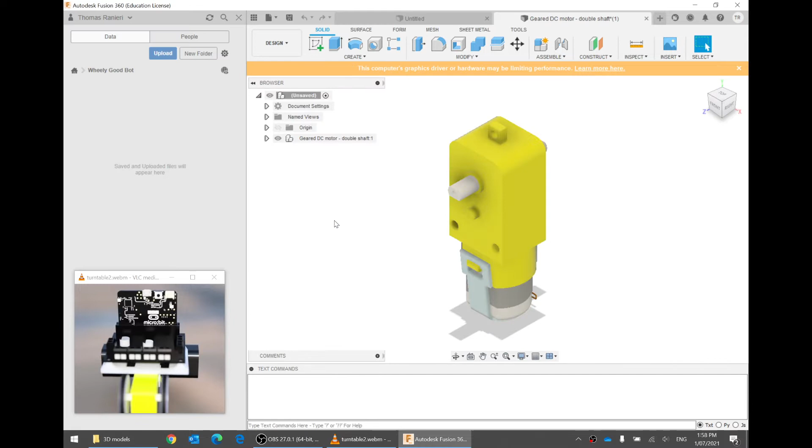There are two here. There's one with a double shaft and one with a single shaft. If you let this go spinning for a little bit, you can see this motor has a shaft that goes all the way through both sides so that both wheels spin at the same rate. So we need a double shaft. You can double click on that, or you can click on Open, and then it's there. Excellent.

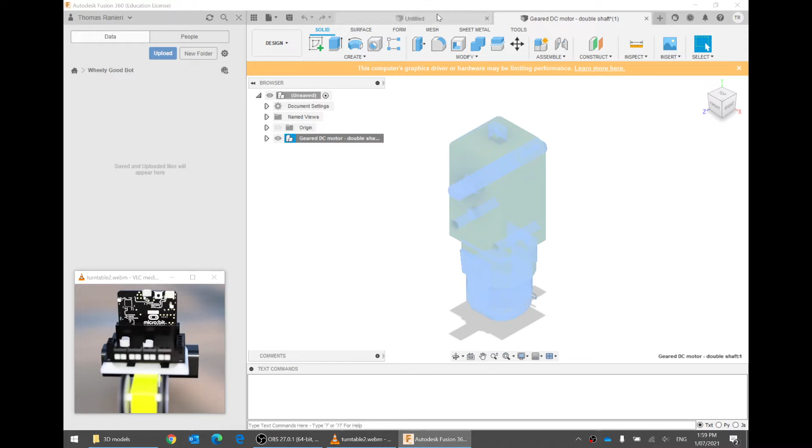But this isn't in our original file. We want everything together. We don't want to have a whole bunch of separate files. So how can I move this component into this file? Good question. I'm glad you asked. If you right click on this component, so you've got the whole model, whole assembly, and you've got this particular component called geared DC motor, you can right click and go copy. Now you can go into our empty file, right click and go paste new and go OK.

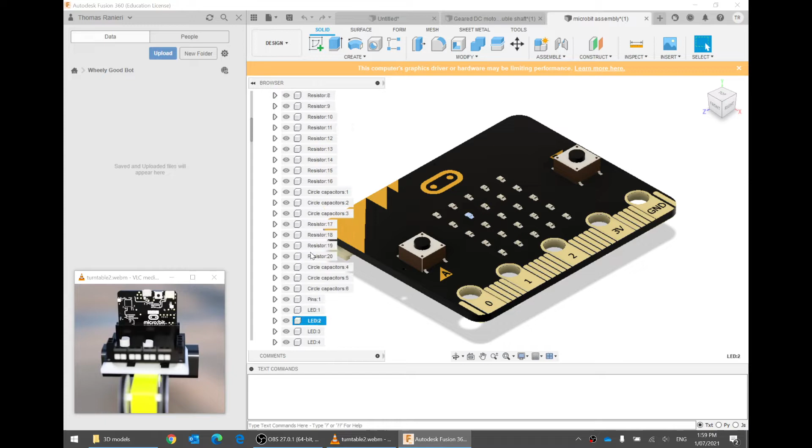We can do the same for all of the other components that we will need. Open from my computer. Let's do the microbit assembly. An assembly is a bunch of components all joined together. You can see the assembly, for example, has a whole bunch of resistors and USB port, and what else has it got? LEDs. So it's everything all together. I'm going to collapse this so we can just see the microbit component. The same thing, right click on the component, copy, go into our empty file and paste new.

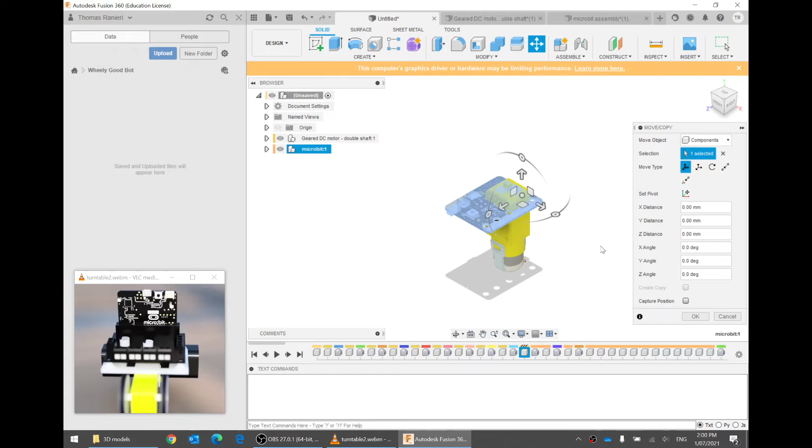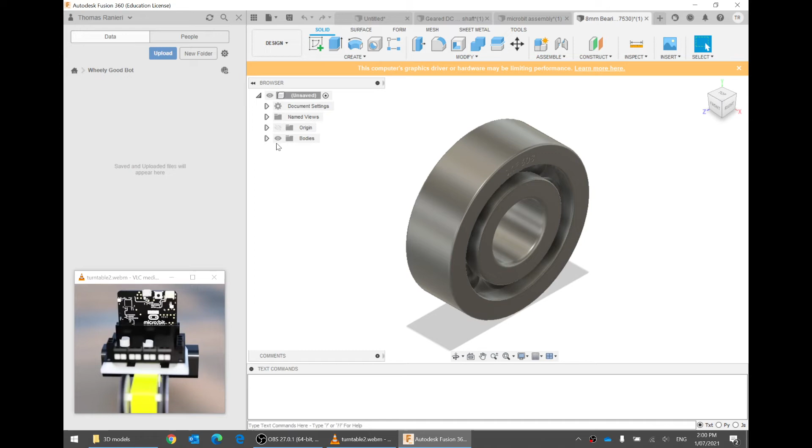But there is one of these that is trickier than the others. I might move this out of the way. There we go, okay. The one that is trickier is 8mm ball bearing. Let's see why. File, open from my computer, 8mm bearing, open. Looks the same, but we don't have a component. We only have individual bodies.

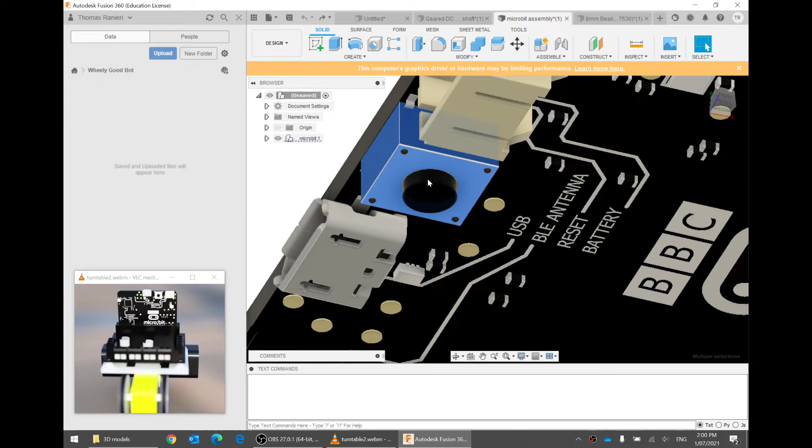A body is a solid shape that's all connected, like this is a body. But a component is often a bunch of bodies joined together and sort of grouped together as one component that makes sense. For example, this button, the button part and this together would probably all be one component, even though really it's two bodies. So, another example is that all of these bodies together have been grouped together to one microbit component. But the 8mm ball bearing just has bodies.

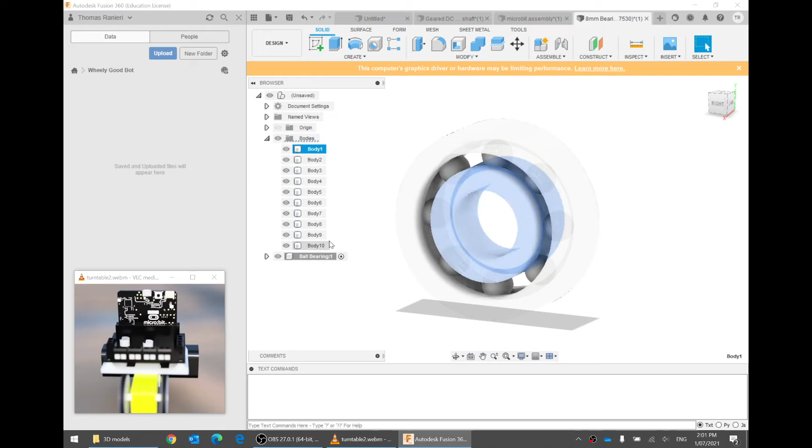I like to work in components, and to do that, we click on New Component. We give it a name. Let's call it Ball Bearing. OK. And now this component has nothing in it. You can see all of the bodies here are not inside the component. So we can click on body 1 and then shift click on body 10 and then click and drag on one of these and drag it into ball bearing. Now ball bearing is a component that contains all of these different bodies.

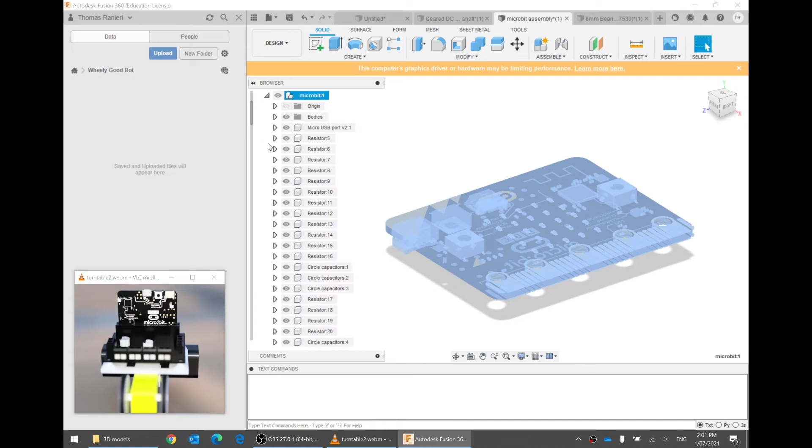I'm not just doing that to be neat and tidy, although it is important to use components to make your model neat and tidy. You can see how they've done that really well in this microbit assembly. They've named everything so it's easy to find. If you click on antenna, then sure enough, it highlights the antenna. A lot of advantages. You can right click and isolate to just see the antenna. It's really, really useful to use components.

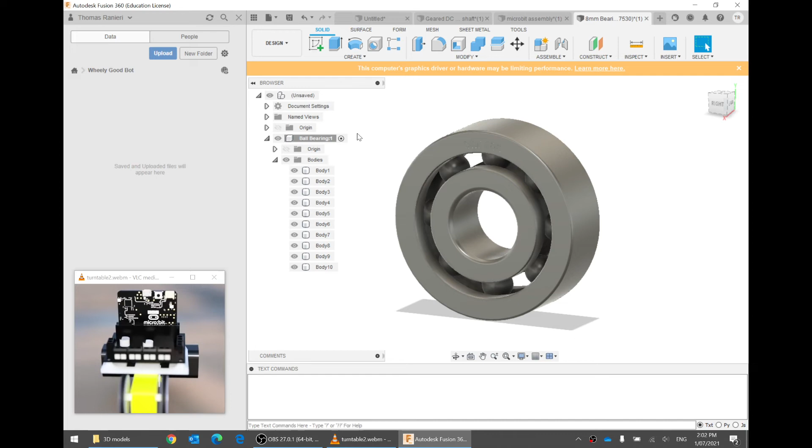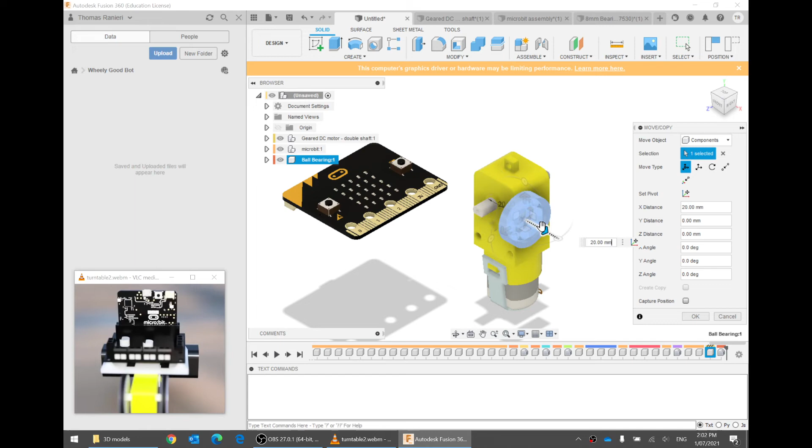But the reason I want to do it here is because you can't actually copy bodies from one file into another file. So now that we've got everything in a component, we can right click on the component, go copy, go in here, right click, and paste new. You can move it out the way. To move it out the way, I would recommend using these arrows, just so things are a little bit separate, and then go OK. Cool.

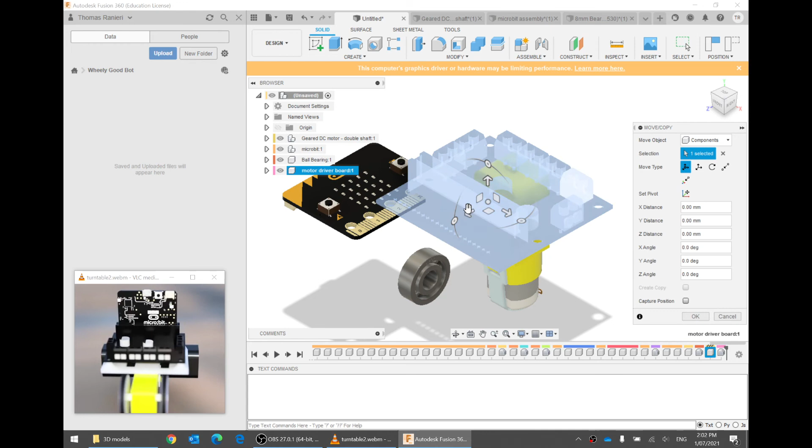So continue in the same way. What else will we need? We will need the motor driver board. So I'll copy that. And shazam! Pop it right in here. And I'll move it over here. Good. And is there anything else we need? I think I need a servo motor. Ah yes, the SG90 micro servo. 9 grams. That is very small. Open.

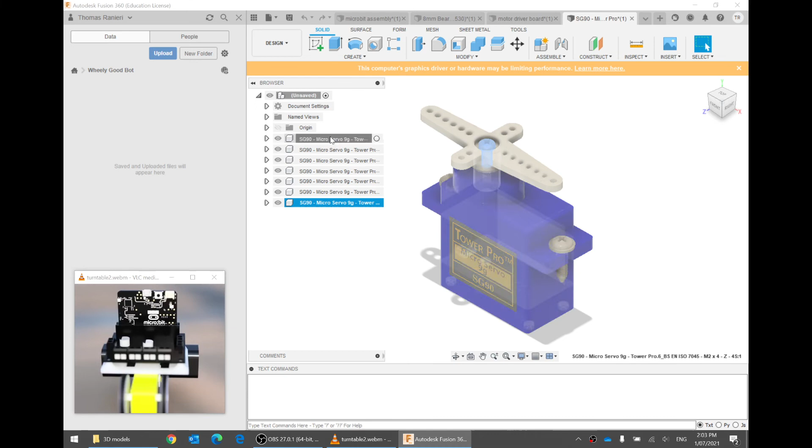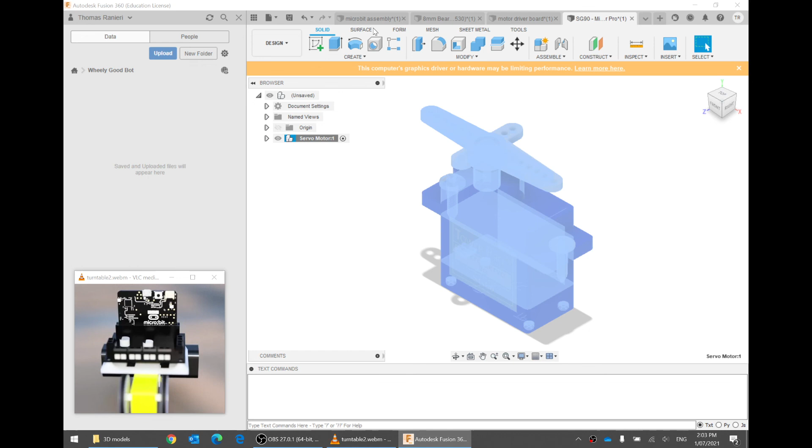Good. This one, you can see they're all different components. So let's make a new component called servo motor. Again, click on the first component, shift click on the last one. That will select all of them. And then I can click and drag into servo motor. Now I can right click on servo motor and go copy, go into my empty file, right click and go paste new, and move that out the way.

Are there any components that we'll need? No, I think that's pretty much all of them. Cool. So now we've got our files imported. Our next step will be to start attaching them to each other.